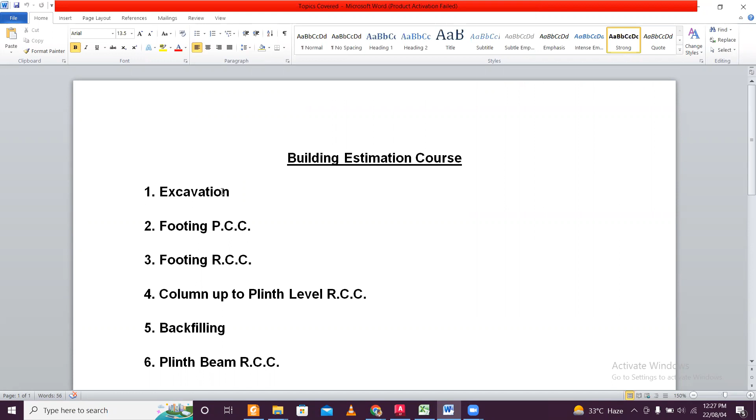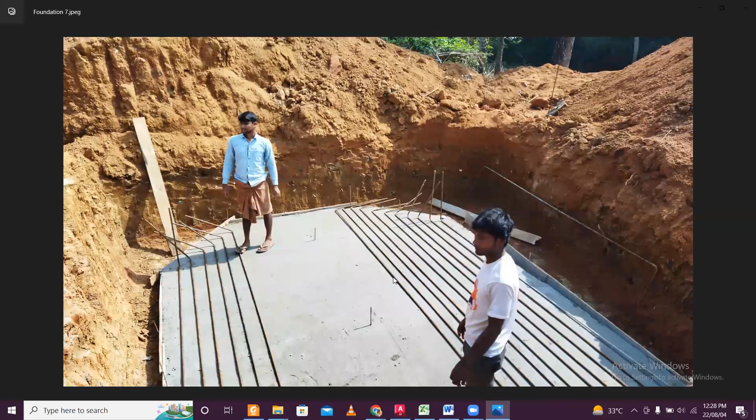We'll continue with the next part, which is the footing PCC. I had shown you pictures of the footing PCC earlier - this is a footing where excavation is done, the PCC is being done, and rods are being laid out for reinforcement. This is the footing PCC, done below the footing, minimum 75mm and in some cases 100mm, depending on your design or drawing.

Let's look at the drawing here. You can see the PCC - 100mm sand filling is there and 75mm PCC is there. Before this footing PCC we can also add the sand filling, because we have to consider that there will be more earthwork. We'll add more cells afterwards. Let's add a new row, copy it using Control+C and Control+V, and label this one as sand filling, since there is some sand filling also before the PCC.

Why not just do it also? Okay, sand filling - you can use the wrap text option if you want to accommodate it, just extend it for sand filling. Now sand filling will go under 2.1, and it is for the foundation. Sand filling is required in other parts as well, but we'll deal with that later.

For foundation F1, F2, and F3, the length and breadth will copy but the height will not. This is because the amount of earthwork done determines the sand filling required in that part, so that remains the same. For the height, as you can see in the drawing, the sand filling is 100mm, so 100mm sand filling will be done.

If any other sand filling is required, we'll deal with it later - we're looking at the foundation now. So the next part is the footing PCC, plain cement concrete in ratio 1:4:8, 75mm below every footing, and it will be the extended portion. The amount of sand filling or excavation done, the breadth, will remain the same.

So here we'll just copy this sand filling part and paste it here, and this will be number three, and this will be your PCC, and now this will be 3.1, and obviously this PCC is also for foundation. Other parts of PCC required, we'll deal with it later.

Now this we'll just copy it here, F1, F2, F3, and then this portion equals to this one, and this is the same, and we'll also copy it up to here, and both of them will copy up to here. So as you can see, everything is copied here. Now this will be 0.075 PCC, and we'll copy up to here.

This also will simply take the same value and copy it up to here, and this also, just drag it down, and we'll drag this down also. Delete these two cells. Now you can see easily we have made PCC for foundation. Now PCC will be in other places as well, but we'll go serially, moving from the foundation, and as we go up, we'll add more.

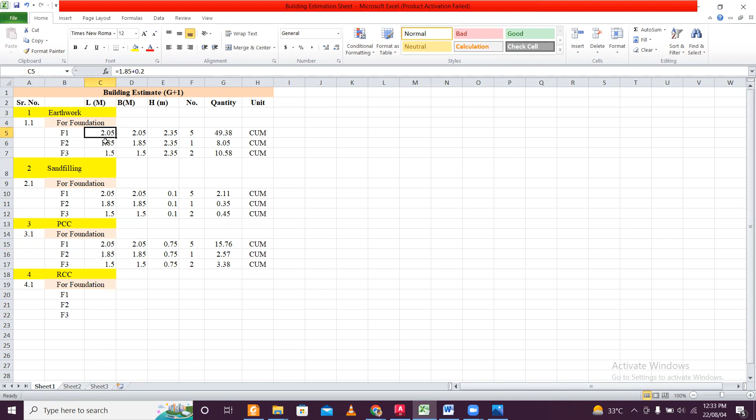Now, in this RCC, it will not be the same as the earthwork. As you can see, in the earthwork we have added 0.2 for the length and breadth. What we'll do is just copy it here. And in this, we don't need this 0.2 because whatever is the size of the footing, exact same RCC will be required. So our footing is the shape of a cube, so it is not a slope footing. If it is slope footing, we have to apply the formula of the slope footing and calculate. So here we have a normal footing, cubical.

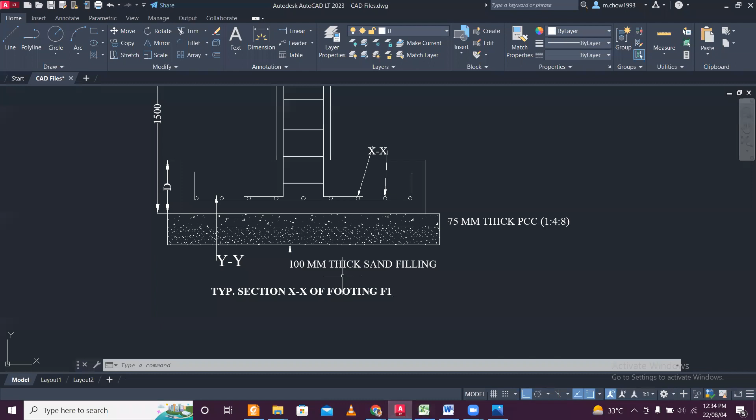So I'll just show you the footing. Those who haven't downloaded the CAD file, you can see this is normal shape footing. Length into breadth into height will get the volume of the footing. It's pretty easy, right? The height of the footing, you can see 1.5, we have done this, but here there will be separate height for F1, F2, F3, right? So we'll just see the footing details here, and every depth is 300 mm. So here we'll just put 0.3, and 0.3 depth is for F1, F2, F3. All the footings have depth 0.3 only, and these numbers are the same.

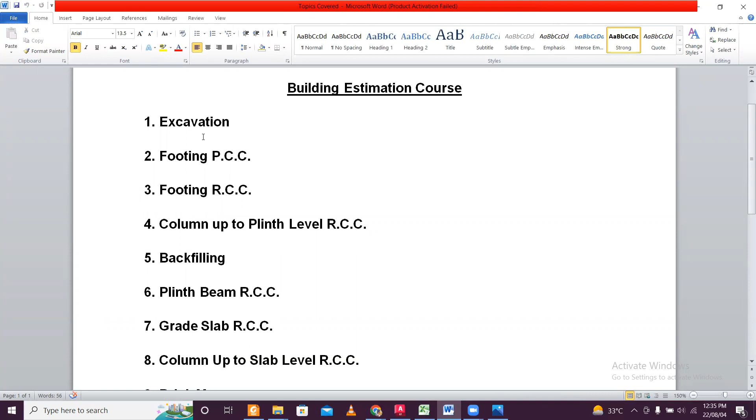So we'll just copy the numbers from above, enter, and double click in the corner. It will give us the multiplication results. So just drag it down and also drag this down, and simply select these 4 cells and click on delete. So we have done this part. We have done the excavation, sand filling, PCC, and then RCC, and then there is your column up to plinth level, and then there is the backfilling. So we can do this column up to plinth level, right?

So we'll do this 4.2, and here we'll just write it. You can just copy this. So why are we doing column up to plinth level, not for the entire structure? Because when you give rates, it is easy. Suppose you want to find the rates up to the plinth level first. Usually we do that, and then from the plinth level to the first level, one floor and then another floor. If you do it separately, it is easy to calculate the rates. So that's why we are doing it like this. Okay, for column up to plinth.

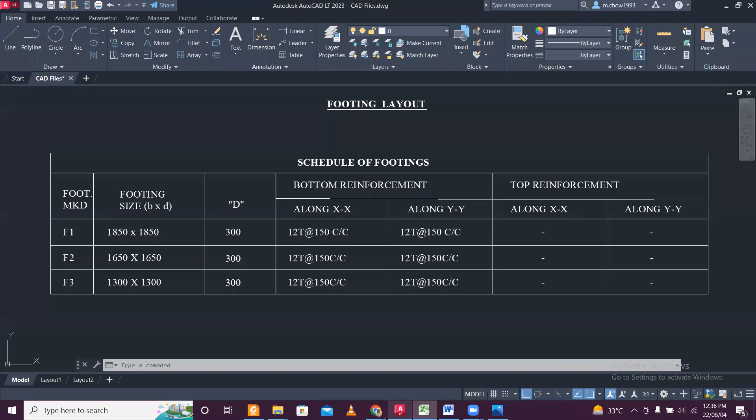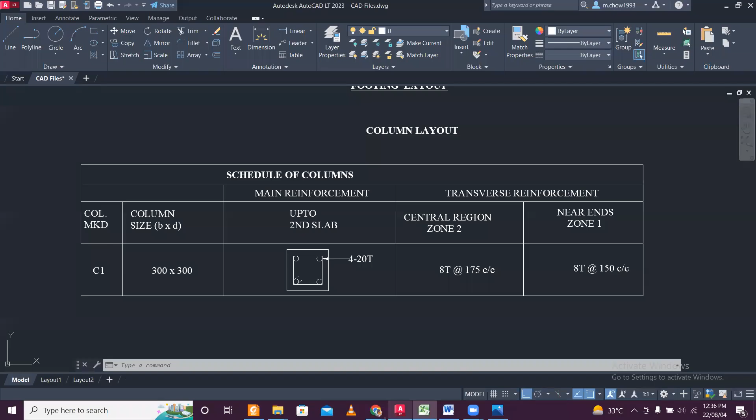into 300. So what we're going to do first, we have one type of column, C1, right? It's good for us. And this length, breadth, and height. So first we give the breadth and the height 0.3 into 0.3. Okay. And the number of columns, we'll just check it here. So it is 1, 2, 3, 4, 5, 6, 7, and 8. 8 number of columns are there. So we'll just put 8 here.

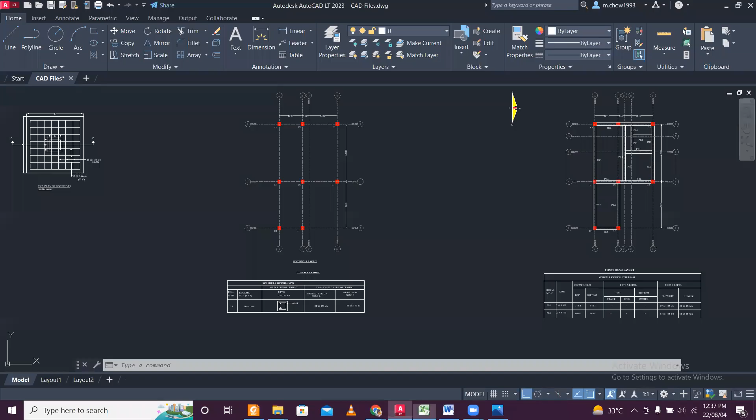Okay. And here for the length, you can just change it, or what you can do, length and breadth, I'll just put it here 0.3, and in the height we'll just put the height of this column. So height of the column, how to do it? It's pretty easy. Just look at the structural drawing, everything will be given. So now this portion which is inside the footing we already have considered, and this portion below and from the plinth beam we will consider in the plinth beam itself.

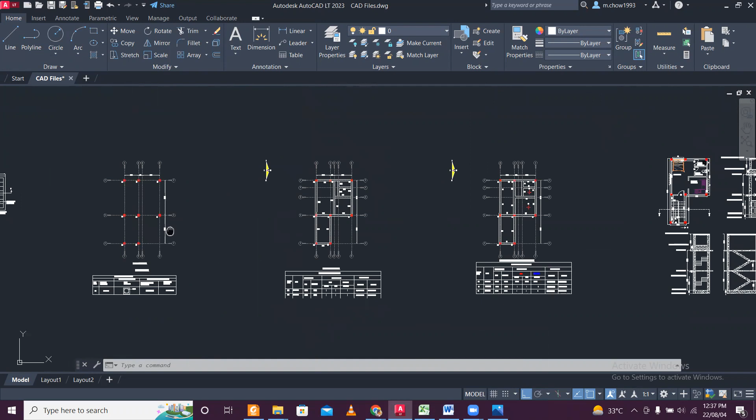Okay, so when we consider the plinth beam, like in this diagram, we'll not deduct the column, we take the total plinth beam. So this particular portion will be considered along with the beam. So what we'll do, we'll take the footing size as, I'll just open the calculator to just show the reference. And when you have different sizes, you can take an average also.

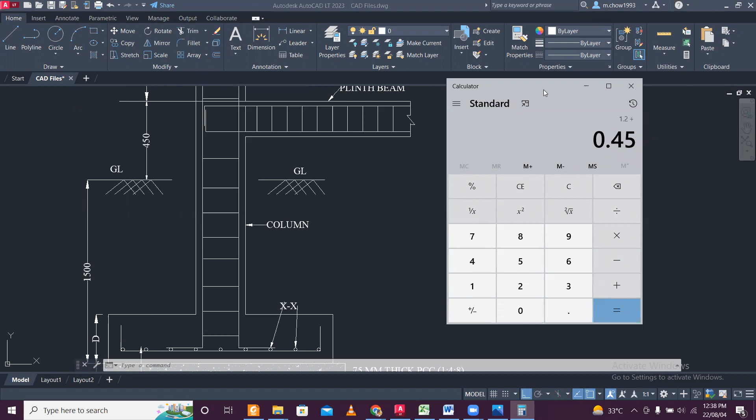So the footing size will be 1.5 meter. Okay, sorry, the height is 1.5 meter to ground level minus the footing depth, it is 0.3 meter. Okay, which equals 1.2 meters, right? 1.2 meters plus your 0.45 meter up to the plinth level, which is equal to 1.65. And let's see the plinth beam. So the plinth beam sizes are 300. So we'll just deduct minus 0.3. So it is 1.35.

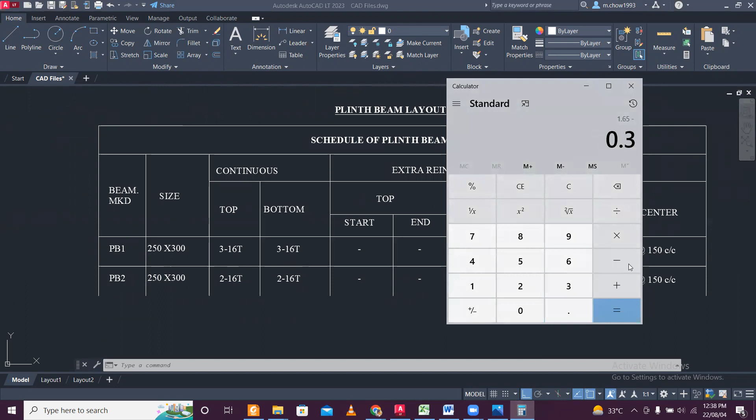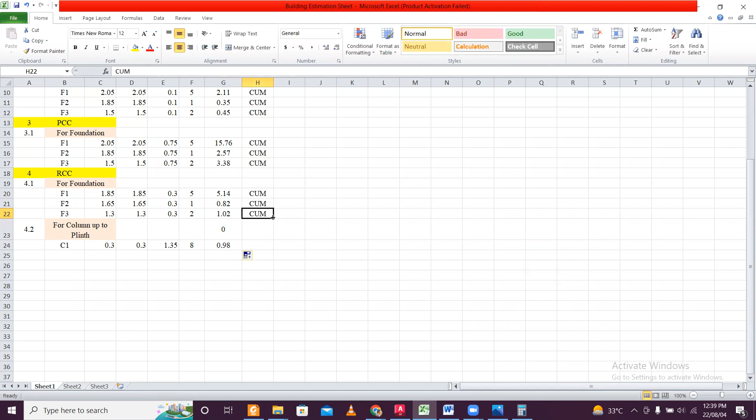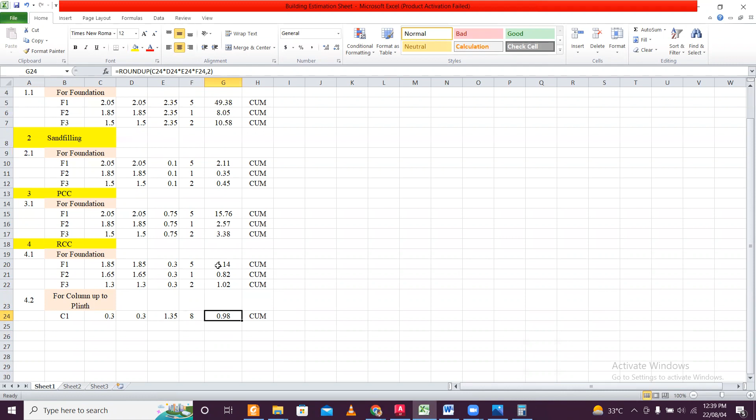So if we take 1.35 height, then we'll consider from this portion to this portion below the beam. So like this you need to take, and if you have different sizes, then you have to go with different sizes as well. So our particular height in this is 1.35. So you have to take 1.35 meter here, and again, as you know, just drag it below, select these two and delete. So this is the column up to plinth level, 0.98 cubic meters of RCC concrete quantity is required in this particular column up to plinth.

Okay, so after this comes your backfilling and this plinth beam RCC. So both these two we will do in the next video and next lecture.